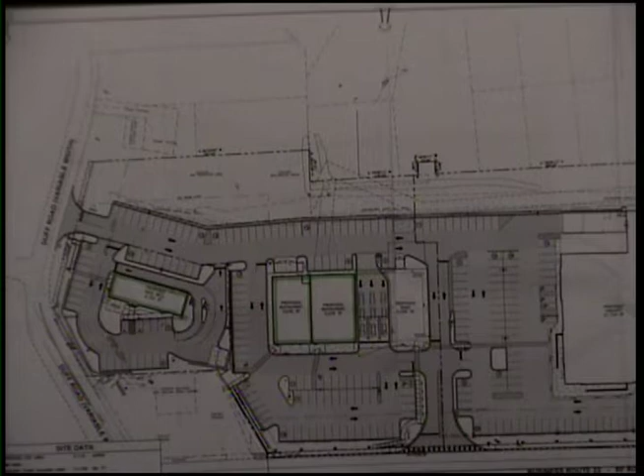So before we had Taco Bell in this location here with a single drive-through, what we've encountered during COVID is that these drive-throughs are getting very popular, and so everyone's going to a dual drive-through. So what happened here was we've been trying to figure out a use for the Gurman property, the white building on the corner. Just didn't come about. A lot of it had to do with being behind the Jiffy Lube.

And then about 3-4 months ago, the current Taco Bell owner sold to a bigger franchisee out of Philadelphia. I think he's got 200-300 stores. And when that happened, he came to me and said, hey, we want to do a little bit bigger Taco Bell, but what we really want to do is a drive-through, a double drive-through on this. Is there any way to accomplish this? The way the site plan was previously approved, that would have been very, very difficult.

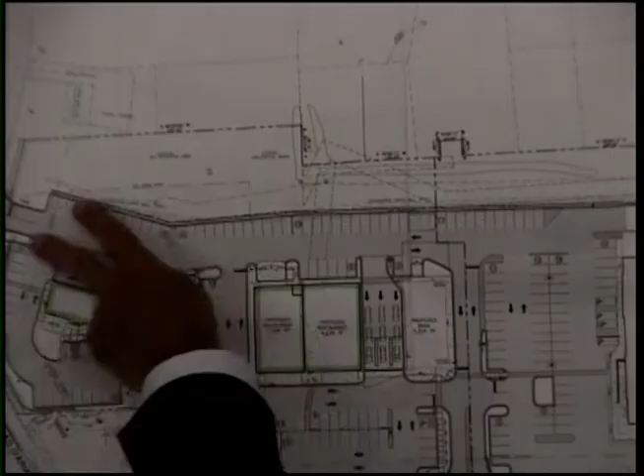And so I was able to rework the plan with the Gurman piece, and we had this extra parking at the tail end here towards Duff. Really, it's kind of like a very nice mousetrap that we were able to fit and work onto the site. It keeps the drive-through towards one end of the property, away from the rest of the center. It makes it very clean.

So we were in front of the board a couple weeks ago and got variances, and they were approved, and we're excited. Aldi, I think, is going to open in June. Key Bank is going to open in probably June or July.

And then what we have is the two buildings here. Mission Barbecue is working with us. They know this is a better plan, it flows better. And then we're also talking to another restaurant that would be like an AM type use for going next door to Mission Barbecue.

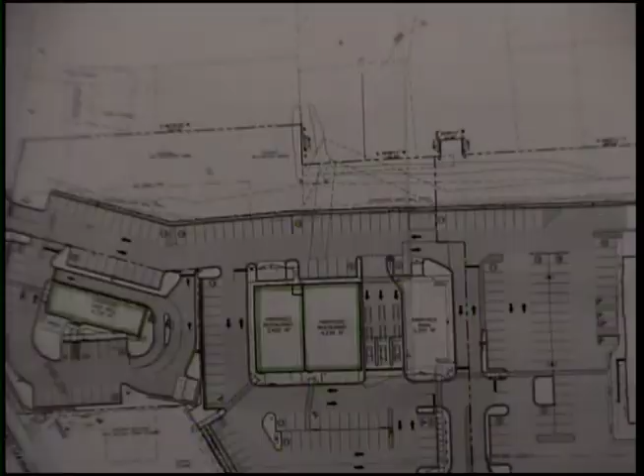So we're excited because I think this plan works really well. And I'm here to answer any questions.

One question I have with the new plan: the Taco Bell parking shown there, is that designated just for that, or is it still included with the overall shared parking of the entire site? It's included in the overall shared parking. But we actually have more parking on this plan than previous, with the Taco Bell added, I think we added 5 more overall spaces versus the variance we had before.

Something like that. So you can park anywhere and go to any of the 4 stores? Correct. And the proposed uses actually work well with each other because there's a bank and an AM restaurant, so for the evening restaurants, those parking spaces will be open. So the shared parking agreement works well in this development. Yeah.

And again, for the newer members here, the majority of the site has already been approved. It's more this left-hand third of the page, if you're looking at it, that's some of the revision areas. So all the stormwater and everything like that has already been brought before us, approved, and moved forward.

It's quite a site. I'll be honest, I keep driving by it. I've been in development for probably 500 buildings in my career, and this is the most unique. I hand it to Frank Zacchaeus, who built up the site. I've had 2 or 3 residents reach out to me and thank me for bringing this, they're excited about it. So you don't get that every day. Yeah.

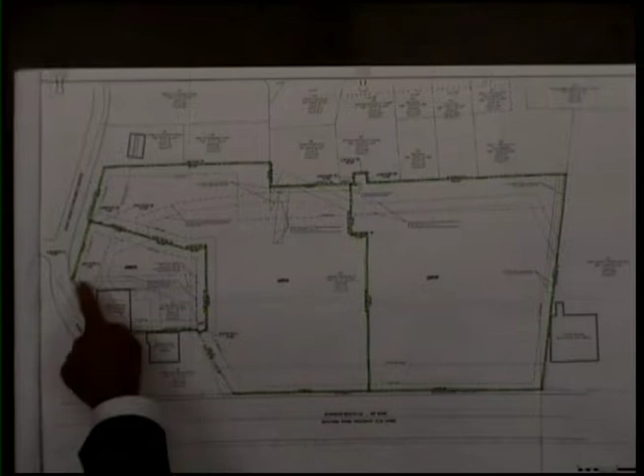So the Gurman piece is separate now. Is that basically a restaurant? Is that another restaurant? The Gurman piece is the white building that's there, the audio communication building, slash pizza, slash something else, I don't know, vape I think. Something. So we're excited about trying to get that out of there.

Any questions from planning commission? Then I will seek a motion for 21-4-SUB. Second. Motion by Bruce, given a second. All in favor? Aye. Any opposed? That also carries, thank you.

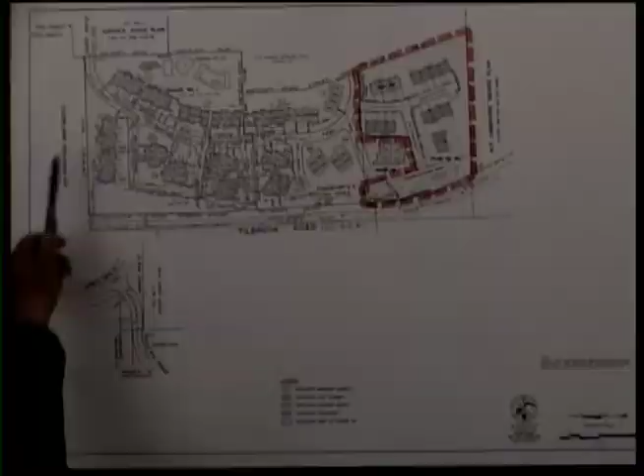This is the overall plan of Spring Run. The main entrance is off of Macbeth Drive. Tilbrook Road defines the west property line, located along the bottom of the sheet. Cambridge Square Apartments defines the south property line, on the right-hand side of the drawing. This area outlined in red is the proposed Phase 3A, which includes 15 townhouse units. The rest of Spring Run has already been developed. This gives you an idea of where the site is in relation to the Spring Run plan.

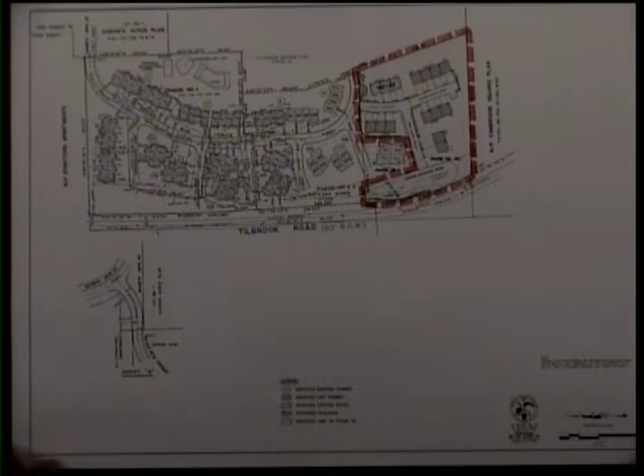Did you say 15 townhouses? There's 15, 3 are already built. Is this the final phase of Spring Run, or is there a possible future phase? No, this would be final. There wouldn't be any land left.

So this is an enlargement of that red outlined area. Back in November, December of 2006, Planning Commission and Council approved this plan. The plan remains the same, it hasn't changed. The only thing we had to do, based on staff's comments, was update the stormwater based on the current stormwater ordinance. Everything else remains the same as what was approved back in 2006.

The roads are already existing, and all the utilities have already been installed. So we're seeking reapproval for the remaining 12 units. These 3 units in the lighter shade of tan are already constructed. They were built in 2007.

Any questions from the Planning Commission? I have a question - you said the previous ones were done 15 years ago, so they were under different municipality ordinances then. Did they have to bring those up to date? You mean like building codes? Right. Yes, they will have to follow current building codes.

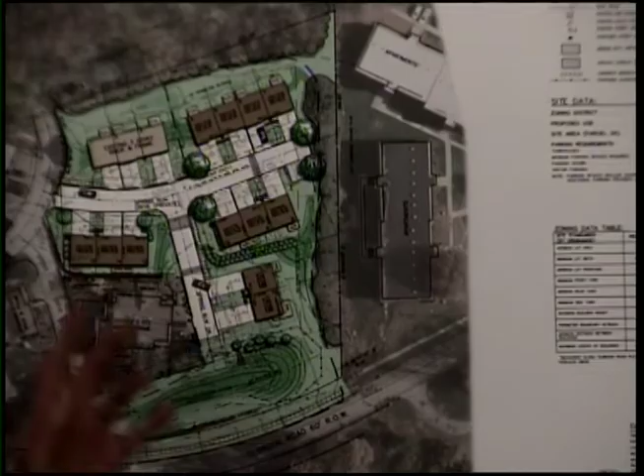There doesn't seem to be any on-street parking. Is that why - yeah, we have two parking spaces here, visitor parking here, but that's pretty much it though. Each unit has an internal garage? Yes, and you can probably get at least 2 vehicles in the driveway, so essentially you can get 4 vehicles per unit.

Actually, I think there are two-car garages, right? Yeah. So you could get two cars in a garage and at least 2 in the driveway, so you'd probably get 4. Any other comments, questions? This is a private drive, right? Correct - the snow removal and maintenance is taken care of by the homeowners association, condo association.

There's no other comments, I'll seek a motion. Bruce motions. Okay, second, anyone? To approve - motion to approve? To approve, yes, okay. Heidi will second? Thank you. Okay, all in favor? Aye. Any opposed? None. Okay, thank you.